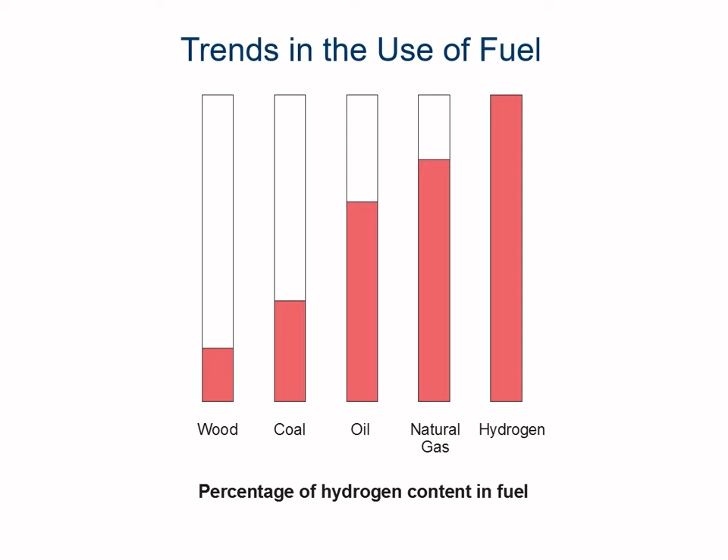Well, the two principal reactions in the burning of a hydrocarbon fuel are the formation of water and the formation of carbon dioxide. So that's going to be the case in wood, coal, oil, natural gas. As hydrogen content in a fuel increases, the formation of water becomes more significant, resulting in proportionately lower emissions of carbon dioxide, which we're all concerned about.

So a wide range of organizations, from energy companies to automobile manufacturers, have been working to develop fuel cells and the accompanying infrastructure that goes along with them. As technology has progressed, so has the production of power.

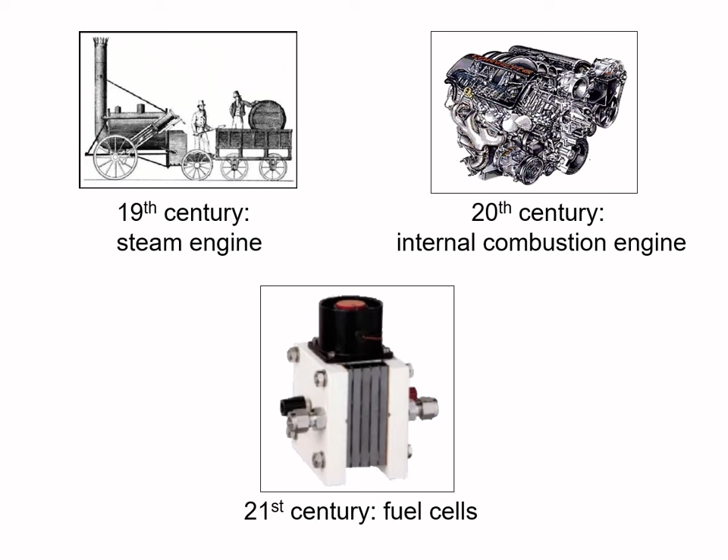All right, the 19th century, that was the century of steam and fueled the Industrial Revolution. The 20th century was the century of the internal combustion engine, and we saw transportation come to the masses. Well, hopefully the 21st century could be the century of the fuel cell. So we need to study it. So let's take a look at the history of fuel cells.

Well, the first fuel cell that was really effectively developed was in 1839 by Sir William Grove. He was a Welsh scientist and lawyer. The principle was discovered by accident. He was performing an electrolysis experiment when he disconnected the battery from the electrolyser and connected the two electrodes together. He noticed that a current flowed in the opposite direction, consuming the gases of hydrogen and oxygen. He called this device a gas battery.

His gas battery consisted of platinum electrodes placed in test tubes of hydrogen and oxygen, immersed in a bath of dilute sulfuric acid. It generated a voltage of about 1 volt.

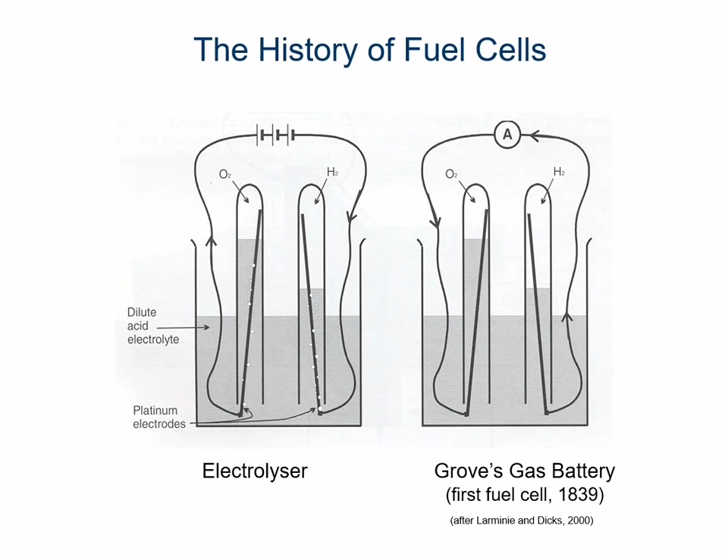So, significant developmental work on fuel cells began again in the 1930s by Francis Bacon, a chemical engineer at Cambridge University. In the 1950s, Bacon successfully produced the first practical fuel cell, an alkaline fuel cell. It used an alkaline electrolyte instead of the dilute sulfuric acid. The electrodes were constructed of porous sintered nickel powder so that the gases could diffuse through the electrodes to be in contact with the aqueous electrolyte on the other side.

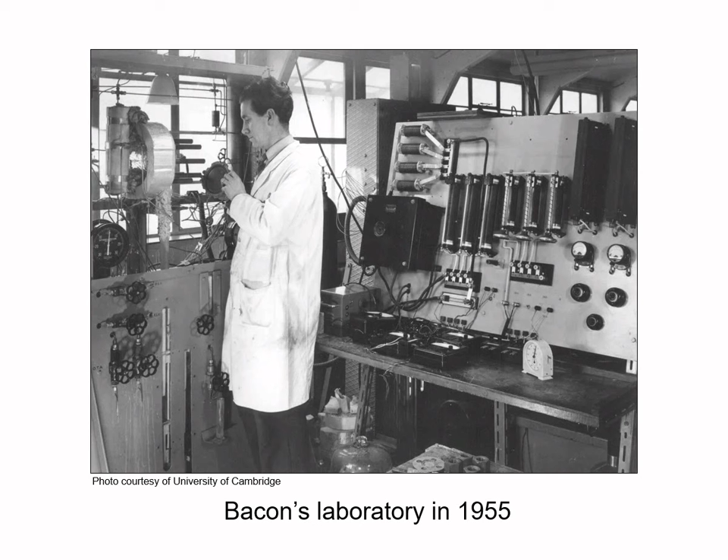This greatly increased the contact area between the electrodes, the gases, and the electrolyte, thus increasing the power density of the fuel cell. In addition, the use of nickel was much less expensive than that of platinum. An assistant can be seen in this photograph mounting a plate onto the side of Bacon's fuel cell stack.

The Bacon fuel cell was modified by NASA in the 1960s as a method to supply onboard drinking water as well as electricity for the astronauts aboard the Apollo space missions. An alkaline fuel cell was also used in the Space Shuttle Orbiter.

The Space Shuttle Orbiter fuel cell has been produced since the 1970s by International Fuel Cells USA. It produces 12 kilowatts of electricity, weighs about 202 pounds, and occupies a space of about 4.6 cubic feet. All right, well, they've gotten a lot smaller since then.

Alkaline fuel cells offer the advantages of high voltage output per cell. Each of the cells that were on the space shuttle has an operating voltage of about 0.875 volts, and that non-precious materials can be used as electrodes.

The primary disadvantage of alkaline fuel cells for terrestrial applications is that of carbon dioxide poisoning the electrolyte. Carbon dioxide, present in both the atmosphere as well as in the reformate, the hydrogen-rich gas produced from the reformation of hydrocarbon fuels, reacts with the hydroxide ion in the electrolyte to form a carbonate, thus reducing the hydroxide ion concentration in the electrolyte. This reduction in hydroxide ion concentration inhibits the ability of the fuel cell to generate the current.

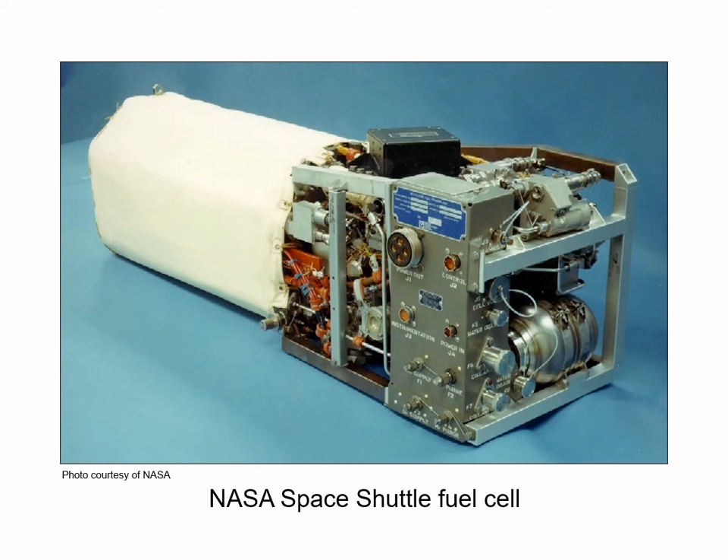In the mid-1980s, Ballard Power, based in Vancouver, British Columbia, and working on a contract from the Canadian Department of National Defence, made significant breakthroughs in fuel cells. Working with Johnson Matthey in the UK, they developed PEM fuel cells, which had a significant increase in power density. From these breakthroughs, it was recognized that fuel cells could be made small, powerful, and inexpensive enough to replace conventional power technologies.

The California Low Emission Vehicle Program of the California Air Resources Board, or CARB, has been a large incentive for automakers to develop fuel cell automobiles. This program required that back in 2003, 10% of passenger cars delivered for sale in California must be zero-emission vehicles, called ZEVs. Automobiles powered by fuel cells meet these requirements.

To date, 7 of the world's 10 leading auto manufacturers are building prototypes and plan to introduce fuel cell automobiles in the near future. The Necar 5 shown here was a prototype automobile built by DaimlerChrysler, back when Daimler and Chrysler were together. This automobile is fueled with liquid methanol and has a top speed of over 90 miles per hour, 150 kilometers per hour.

In forthcoming years, there are plans for buses, trucks, trains, all powered with fuel cell engines. And we're starting to see some of that happening today. 30 buses are going to be commercially introduced in 10 European cities beginning in 2002.

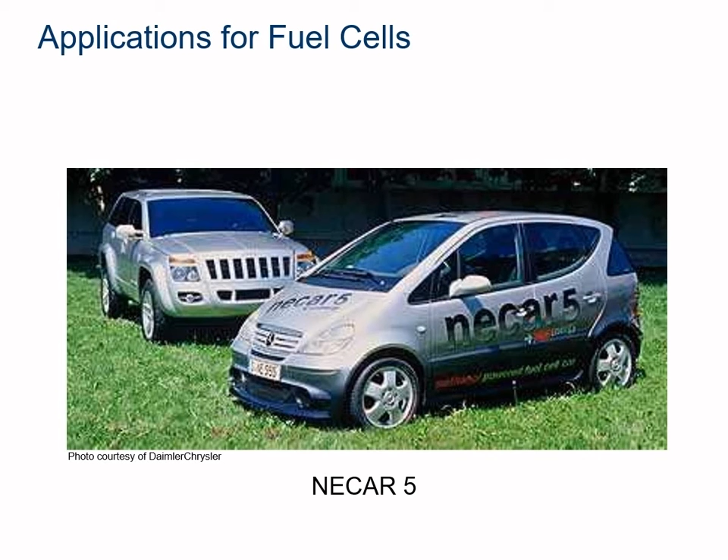Electrical energy demands throughout the world are continuing to increase. In Canada, the electrical energy demand is growing at an annual rate of approximately 2.6%. In America, the electrical energy demand is growing at an annual rate of a little bit less, 2.4%. In developing countries, though, electrical demand is growing at an annual rate of almost 6%. How can these demands be met responsibly and safely?

There are many problems associated with the building of new power plants, both financially and environmentally. Fuel cell distributed power stations provide an excellent solution. Fuel cell distributed power plants can provide high quality, reliable power. Depending on the type of fuel cells used, power plants produce little or no emissions.

Shown here is a prototype fuel cell distributed power plant recently developed by Ballard Power. This particular unit was commissioned for the BC Hydro grid. It provides 250 kilowatts of electricity and about the same amount of heat fueled from natural gas. This is enough power to provide heat and electricity to a community of about 50 homes, for example, or to a hospital or to a remote location school.

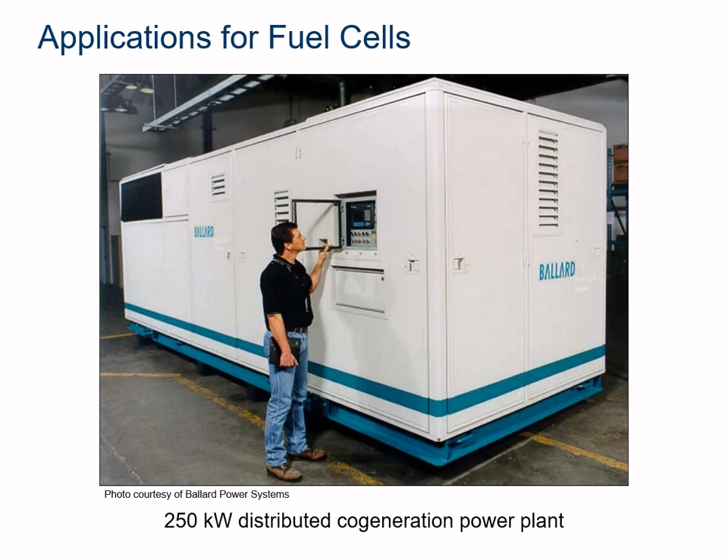85 kilowatt Ballard fuel cells are powering 12 large buses in China right now, and they also have a deal with Toyota to sell fuel cells to other auto manufacturers. Fuel cell power plants are being developed by lots of different manufacturers to provide electricity and heat to a single family home. Fueled by either natural gas or propane, these fuel cell power plants will be able to power a home independent of the grid.

Plug Power, based in Latham, New York, developed a new fuel cell power plant that supplies 7 kilowatts of electricity and heat, using either natural gas or propane as the fuel. That is enough power to supply the electrical demands of a modern energy-efficient home. Initially, these fuel cell power plants will be grid parallel. Eventually, they'll be grid independent. Plug Power plans to commercially introduce this home power plant distributed through General Electric.

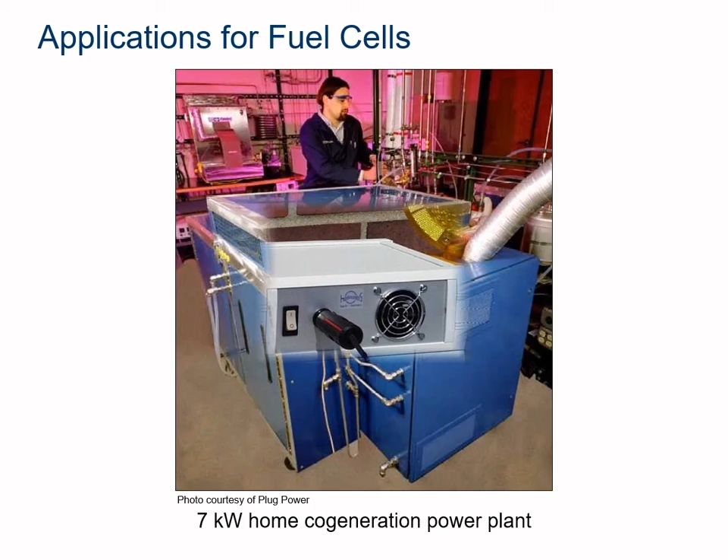Several manufacturers are developing portable fuel cell power supplies. These power supplies can provide anything from a few watts up to several kilowatts of electricity. Portable fuel cell power supplies will be an alternative to conventional batteries for many applications. Applications include laptops, mobile phones, remote road signs, and lighting.

Portable fuel cell power supplies have several advantages over conventional batteries. The primary advantage is that of energy density. Fuel cells can provide a higher energy density by both volume and weight. Thus, fuel cell portable power packs can be lighter and supply power for a longer period of time than that of a conventional battery. In addition, the storage losses for hydrogen fuel cells are practically non-existent. Whereas conventional batteries slowly discharge their power over time, fuel cells powered by hydrogen can maintain their charge almost indefinitely.

The third advantage is that the storage capacity of rechargeable batteries decreases as a function of the number of cycles of charge and discharge, such that they will eventually have to be replaced. Fuel cells will maintain their power output almost indefinitely.

This particular fuel cell is a prototype 50-watt PEM fuel cell by Heliocentris, powering a remote blinking lamp. The fuel cell is contained in the upper part of the unit. The lower part of the unit contains a metal hydride storage cylinder containing the hydrogen.

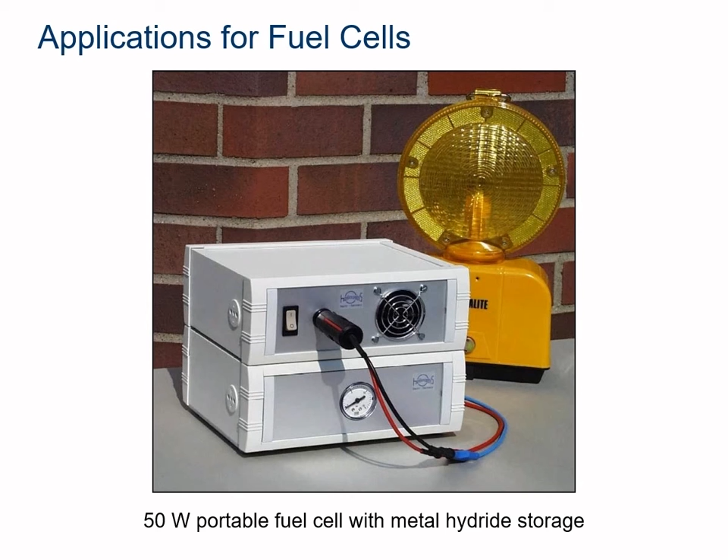Well, that's a problem. If you guys don't have to charge your batteries on your phones, you'll never stop texting.

Fuel cells are classified by the type of electrolyte they use. Different electrolytes operate at different temperatures.

Low temperature fuel cells include the alkaline fuel cell, AFC, the proton exchange membrane fuel cell, PEMFC, and the phosphoric acid fuel cell, PAFC. All these fuel cells use hydrogen as a fuel. This hydrogen can be extracted from natural gas, biogas, methanol, or propane by the process of reformation. The hydrogen can also be created through the electrolysis of water.

High-temperature fuel cells include the molten carbonate fuel cell, MCFC, and the solid oxide fuel cell, SOFC. These fuel cells offer the advantage that they can use either natural gas or untreated coal gas as a fuel, directly without the use of a reformer, through a process called direct internal reforming.

The sixth type of fuel cell is the direct methanol fuel cell, DMFC. It is also a low-temperature fuel cell, but it can use methanol as a fuel directly without the need of reforming. The primary limitation to the direct methanol fuel cell is that the rate of reaction on the anode is very slow. This results in a very low operating voltage output. For certain applications, portable power for example, the direct methanol fuel cell may be ideal.

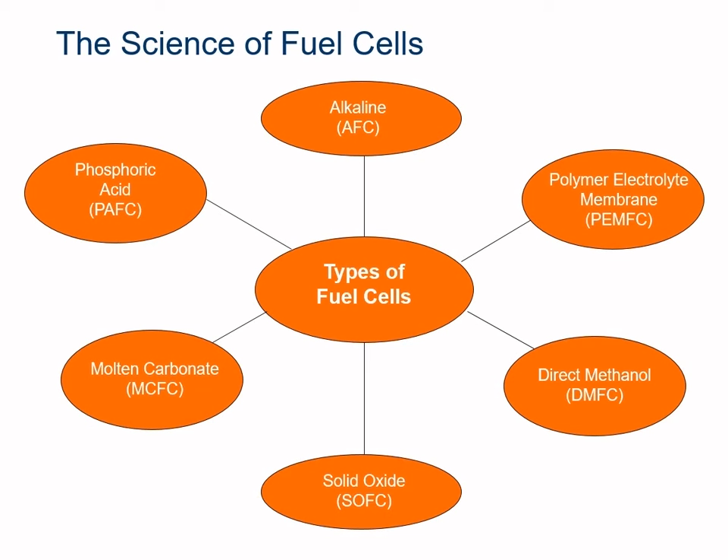A fuel cell is a device that through an electrochemical process converts hydrogen and oxygen directly into water. In this process, energy is released in the form of electricity and heat. The chemical process is electrolysis in reverse.

In the PEM fuel cell, the proton exchange membrane fuel cell, hydrogen molecules are oxidized at the anode to positively charged hydrogen ions, protons, releasing electrons to the cathode via an external electrical load. That means that those electrons are going to flow from the anode to the cathode. That flow of electrons is electricity, and we can put it to work. We can make it do work for us.

The protons diffuse through an ion-conducting membrane. This ion-conducting membrane allows the protons to move through, but not the electrons. So the electrons have to take the long way around, and that long way around travels through, let's say, a motor or a light, in the form of electrical current. At the cathode, oxygen combines with the electrons and the protons to form water. The overall reaction is hydrogen plus oxygen producing water.

In this diagram, we can see the various components of a simple fuel cell. A single cell consists of two field flow plates, one for hydrogen and one for oxygen, separated by a membrane electrode assembly, abbreviated MEA. Field flow plates contain channels to ensure that the gases are in contact with as much of the MEA as possible. As can be seen in the diagram, hydrogen molecules enter on the anode side of the cell, while oxygen enters on the cathode side of the cell.

In an oxidation reaction, the hydrogen molecules release their electrons, which flow from the anode electrode through the external electric load to the cathode electrode. It is this flow of electrons which we observe as electricity. The hydrogen protons flow through the ion conducting membrane to the cathode. At the cathode, they combine with the oxygen molecules and the free electrons to form water. The fuel cell has electrochemically converted hydrogen and oxygen gases into electricity and water. That is an excellent product.

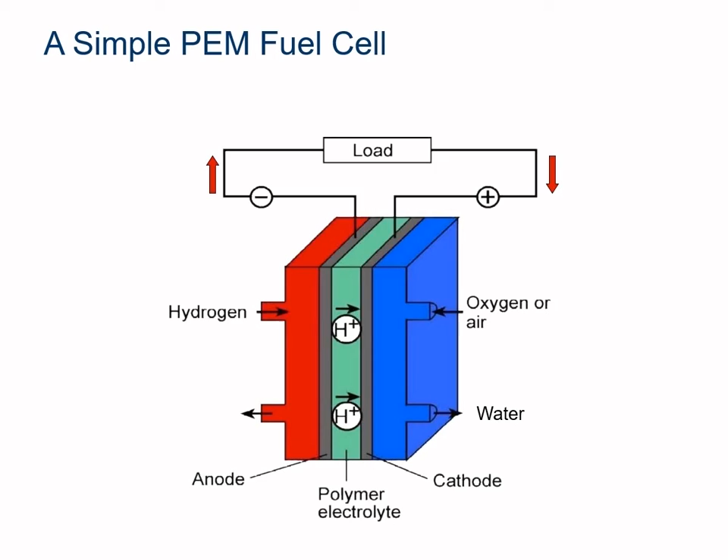The MEA consists of two porous carbon cloth electrodes bonded to each side of a polymer electrolyte membrane. This material, the electrolyte, allows the conduction of hydrogen protons from one side of the membrane through to the other. At the same time, it prevents oxygen molecules from flowing in the reverse direction. On the electrodes are nano-sized particles of platinum. The platinum acts as a catalyst for the redox reaction to take place.

Initially, the hydrogen molecules are chemically adsorbed onto the platinum surface, forming hydrogen-platinum bonds. Platinum is unique in that it has the ideal bonding strength to both break the hydrogen molecule bond to form the hydrogen-platinum bonds, while being able to release the hydrogen, allowing the redox reaction to proceed.

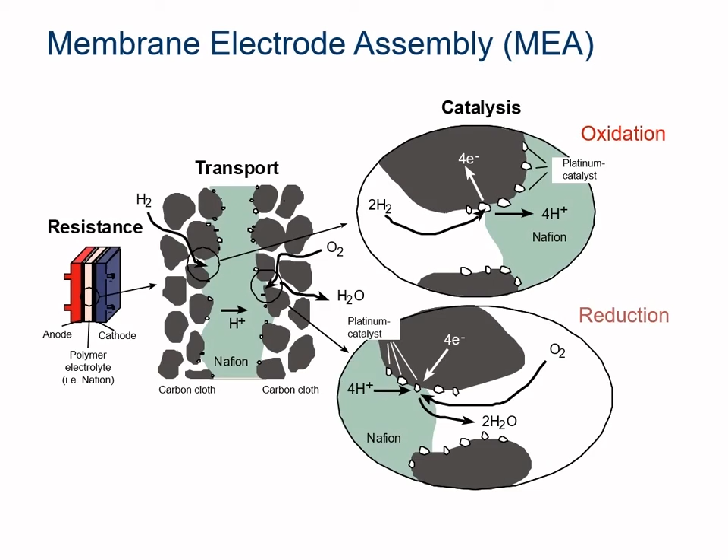A fuel cell, therefore, supplies a current much the same way as a battery. However, unlike a battery, a fuel cell can provide electrical power indefinitely, as long as hydrogen and oxygen are being supplied. The membrane of a fuel cell is between 50 and 175 microns thick. That's about the thickness of 2 to 7 sheets of paper. It is produced in sheets which can be cut into the required size.

The electrolyte membrane consists of polytetrafluoroethylene chains, commonly called Teflon. On the Teflon chains are side chains ending with sulfonic acid, HSO3. A close-up view of the membrane material shows spaghetti-like long chain molecules with clusters of sulfonate side chains.

An interesting feature of this material is that whereas the long chain molecules are hydrophobic, meaning they repel water, the sulfonate side chains are highly hydrophilic. They attract water. Hydrophobic versus hydrophilic. The hydrophilic regions absorb large quantities of water. Within these hydrated regions, the H+ ions of the sulfonic acid are able to move, creating the ability for this material to transfer the H+ ions, the protons, from one side of the membrane to the other.

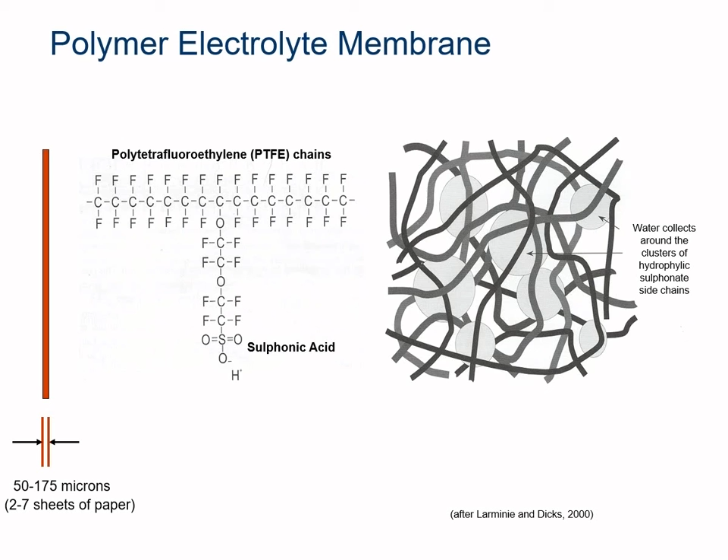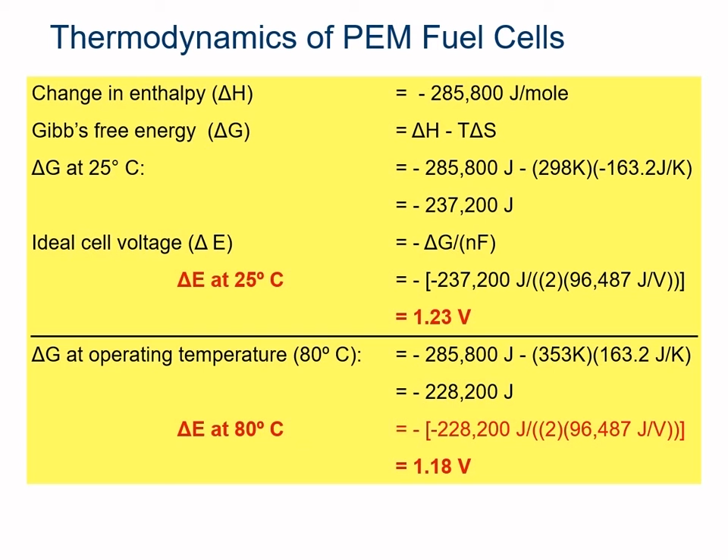For this reason, the hydrated regions must be as large as possible. Working through the calculations, we see that the ideal cell voltage at room temperature is 1.23 volts. However, as the fuel cell heats up to an operating temperature of about 80 degrees Celsius, the ideal cell voltage drops to 1.18 volts. More factors are involved in practical fuel cells, which reduce the cell voltage considerably.

Mass transport, often called concentration losses, is a result of the reduction of the concentration of hydrogen and oxygen on the electrode surface. This is due to the failure to transport the required gases to the electrode surfaces. By careful design in all of the components involving science, engineering, and the technical trades, these losses can be minimized, resulting in fuel cells that are efficient and deliver high power density.

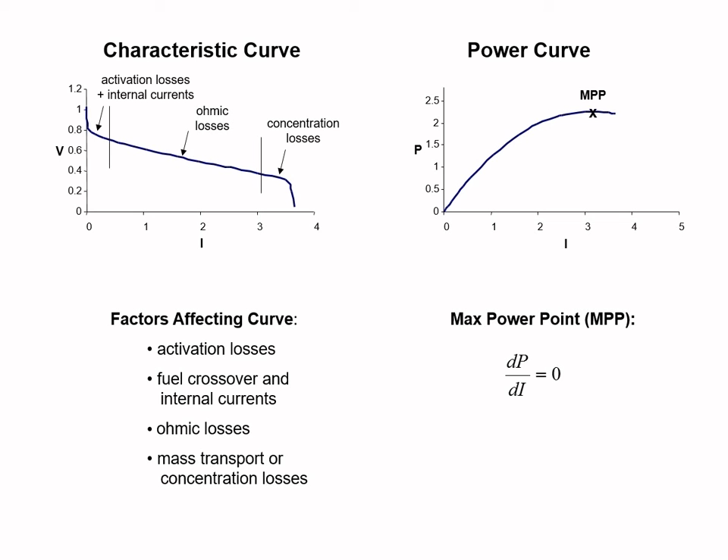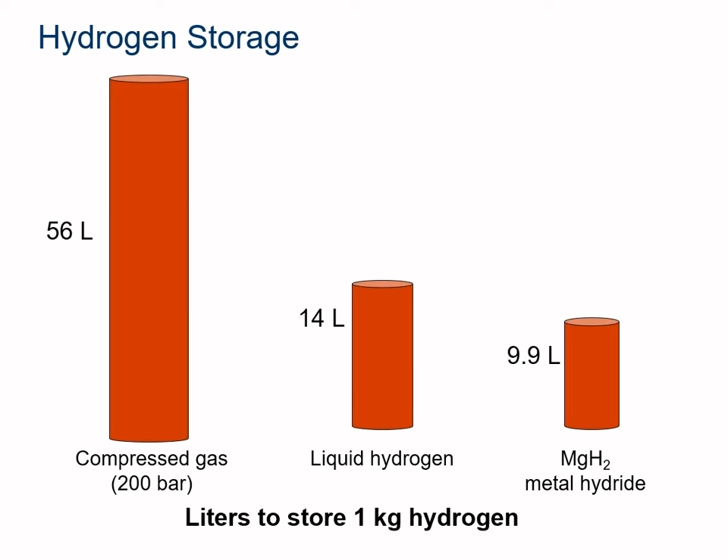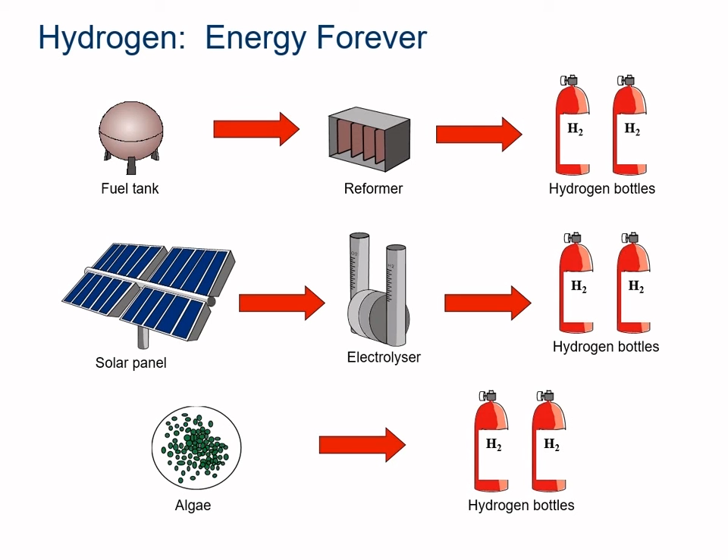Reformers convert a hydrogen-rich fuel such as natural gas, methanol, or even gasoline into pure hydrogen, plus the emission of carbon dioxide. They work via a catalytic process combining the fuel with water vapor at a high temperature. The result is fuel cell automobiles are able to carry liquid fuels, and fuel cell stationary power plants can use natural gas or propane. For the immediate future, as long as fossil fuels are available, the use of reformers is the most cost-efficient method for producing hydrogen.

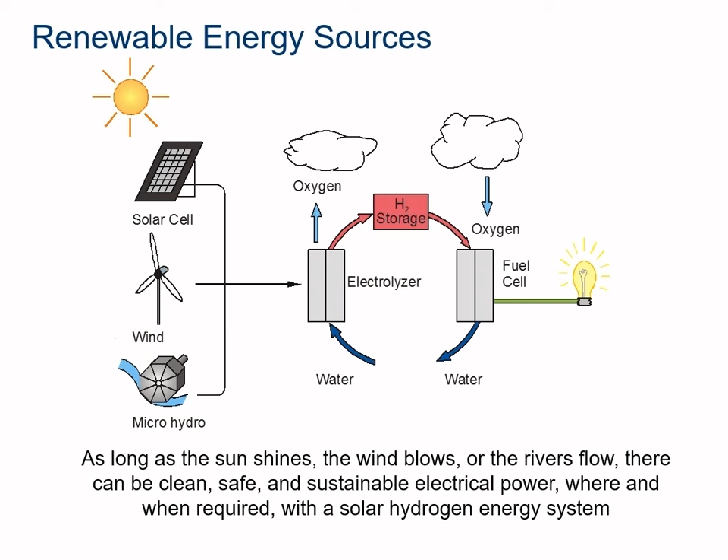As long as the sun shines, the wind blows, or the rivers flow, there can be clean, safe, and sustainable electrical power, where and when required, with a solar hydrogen energy system. Fuel cells are efficient. As fuel cells convert hydrogen and oxygen directly into electricity and water, there is no combustion in the process. As a result, the efficiency is high, between 50 and 60%, about double that of an internal combustion engine.

Fuel cells, of course, are clean. If hydrogen is the fuel, there are no pollutant emissions from a fuel cell, only the production of pure water. In contrast to an internal combustion engine, a fuel cell produces no emissions of sulfur dioxide, which can lead to acid rain, oxides of nitrogen, which produce smog, or particulates, grit, and dust. If methanol or natural gas is the fuel, there's an emission of carbon dioxide. However, as the efficiency of a fuel cell is higher than that of an internal combustion engine, the emission of carbon dioxide is proportionately lower.

Fuel cells are quiet. A fuel cell itself has no moving parts. However, a fuel cell system may have a few moving parts, including pumps and fans. As a result, a fuel cell produces electrical power virtually silently. Many hotels and resorts in quiet locations, for example, would like to replace diesel engine generators with fuel cells for both main power supply or for backup power in the event of a power outage.

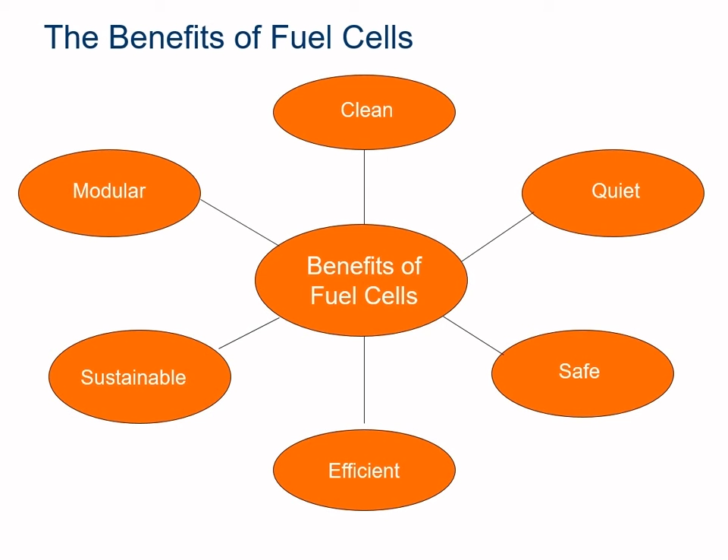Fuel cells are modular. That is, fuel cell stacks of varying sizes can theoretically be combined together to meet a required power demand. Fuel cells are environmentally safe. They produce no hazardous waste products, only the production of water. Fuel cells provide the opportunity to produce a sustainable source of electrical power. If fuel cells get their hydrogen from renewable energy sources, such as solar, wind, hydro, or biological methods, they can provide a sustainable source of electrical power.

So, we do have a responsibility to our planet. We are its custodians. So we want to do what's best to help with that.